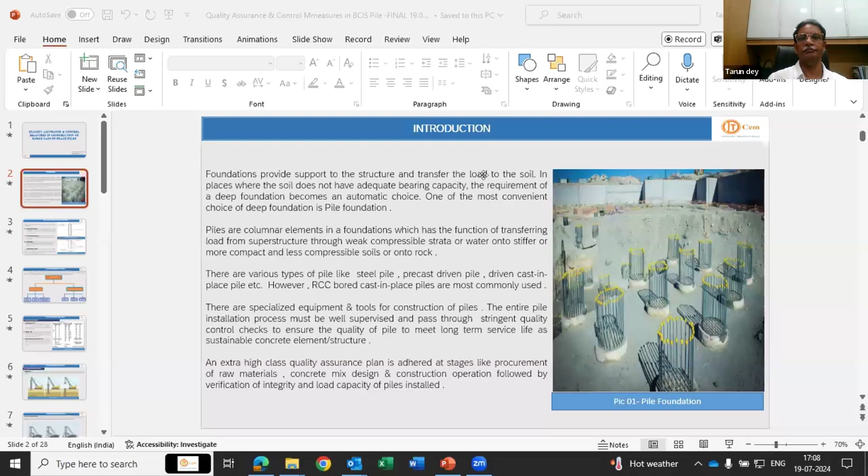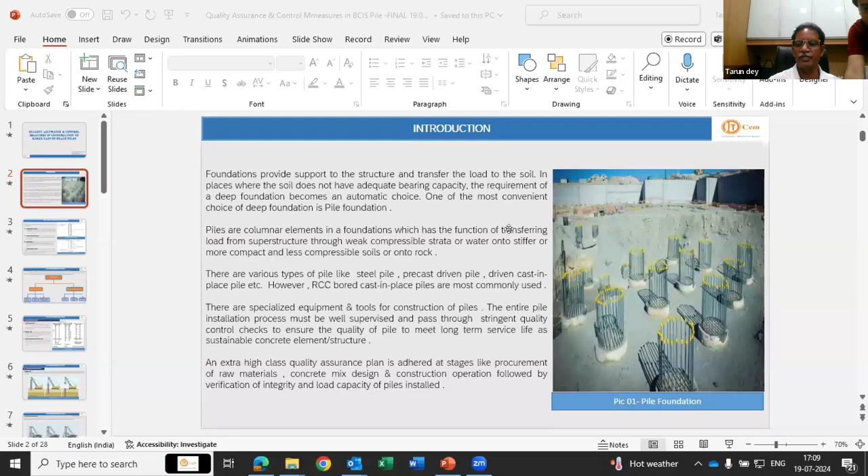This doesn't fully show in slideshow mode. Still not in slideshow mode, sir. Right, yes, yes, yes. Now we can see. Please continue, sir.

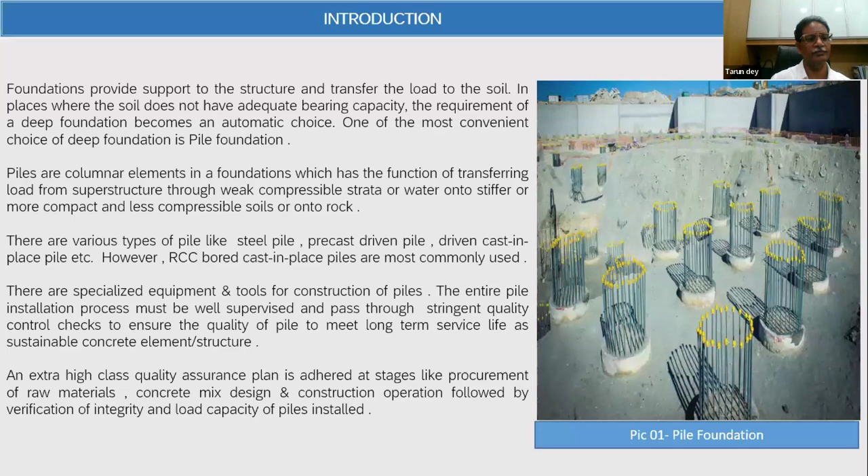There are various types of piles: steel, precast driven, cast-in-situ, bored cast-in-situ. Out of all these, bored cast-in-situ piles are most commonly used. We have specialized equipment nowadays for construction of these piles, but the whole process has to pass through stringent quality control checks to ensure the quality of the product. We maintain an extra high class quality assurance plan right from procurement of raw material to the end of pile construction, so that the integrity of the pile is ensured.

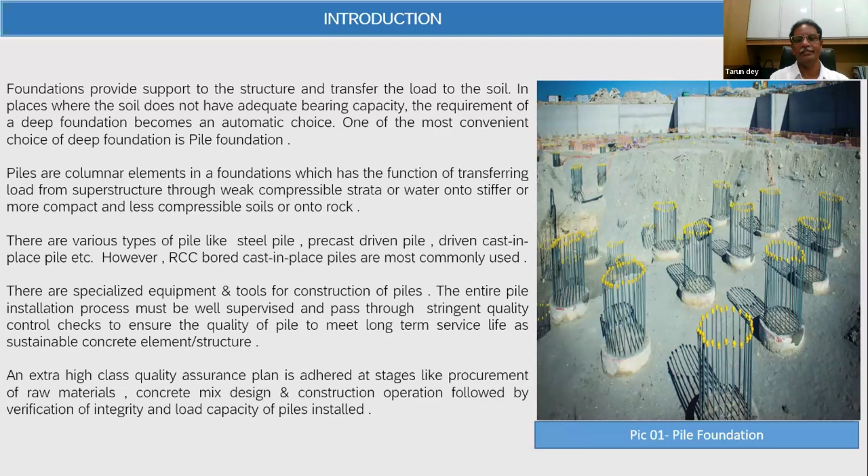On the lateral load, when the pile is loaded, it presses the adjacent soil so that it gets compressed, and both compression and shear happen in the soil mass, which ultimately resists the lateral movement of the pile.

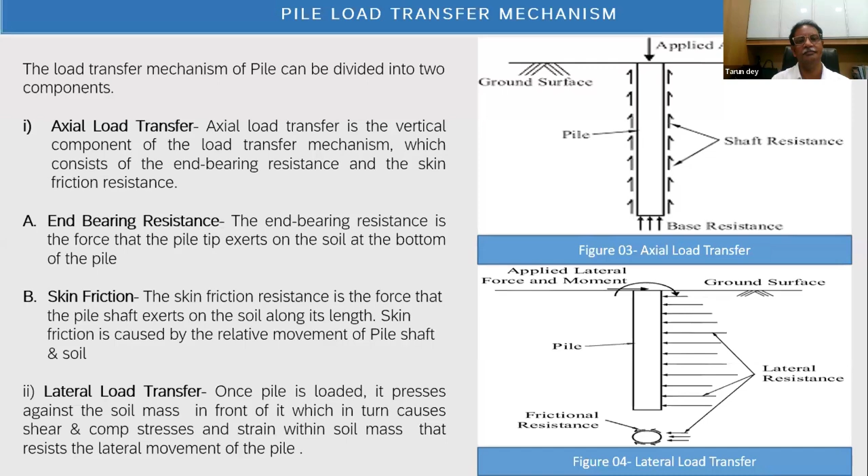In general, all piles are driven or bored into the ground. Broadly, there are two categories. One is called displacement piles. All driven piles are displacement piles, which could be large displacement or small displacement. Large displacement means driven piles with a shoe at the bottom, and small displacement could be hollow tubular piles. So the first category is displacement piles, and the second category is replacement piles, which is bored cast-in-situ piles.

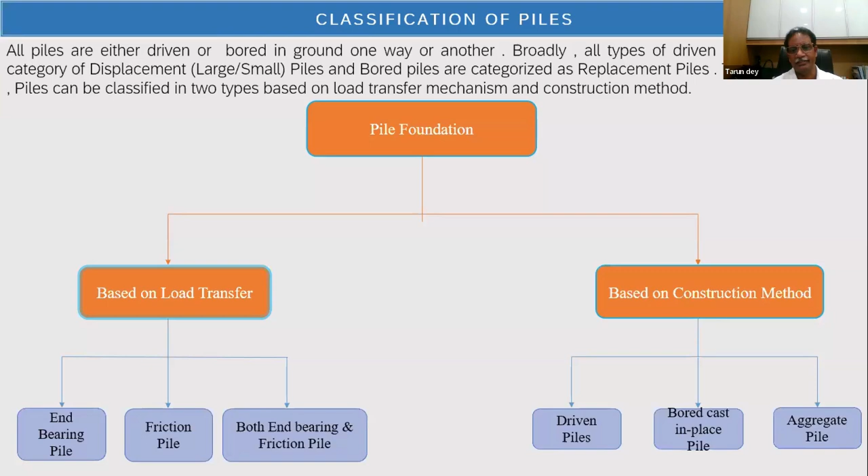Now, how does the load transfer mechanism take place? For end bearing piles, the pile rests on a solid layer, the rock or dense sand stratum. For friction piles, the pile transfers the load of the superstructure using frictional force. There are also piles which have both components, partly skin friction and partly end bearing.

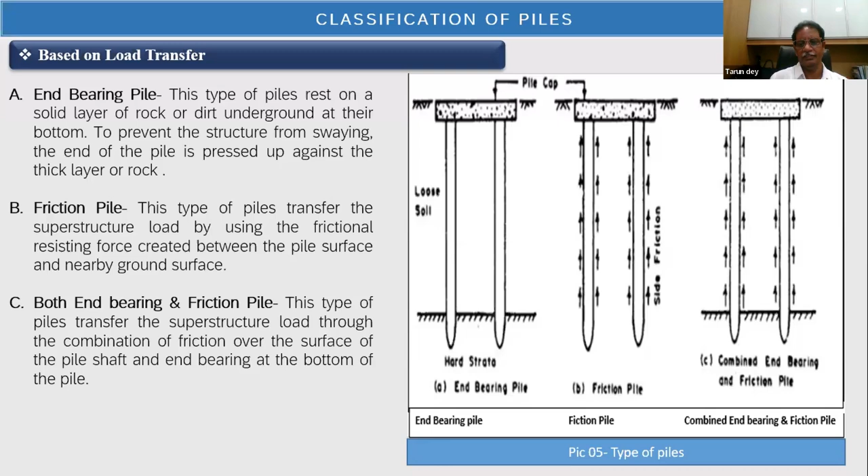This is one construction method, the driven pile, where the pile is driven by a hammer of suitable capacity, which pushes the soil sideways and compacts the layer, ultimately increasing the bearing capacity.

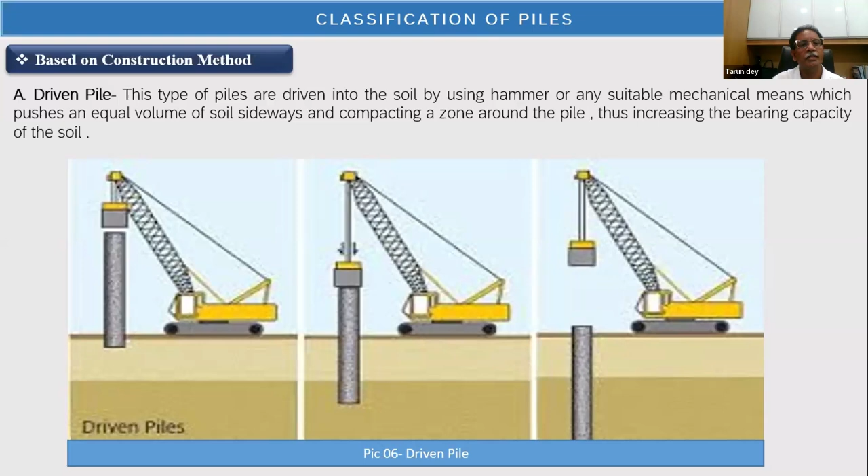This is the bored cast-in-situ pile, shown in three stages. Stage one is boring by auger. Stage two, once boring is completed, lower the steel cage. Stage three is filling with concrete. This is a bored cast-in-situ pile, where the hole is dug into the ground and filled with concrete along with steel reinforcement.

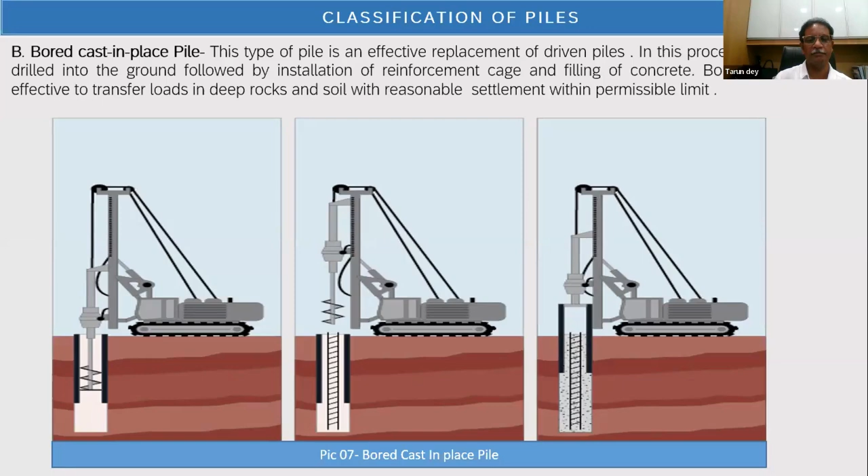Then there's the aggregate pile, similar to a bored pile but with no reinforcement. You dig a hole and put aggregates into it, which pushes sideways and densifies the soil, increasing the bearing capacity.

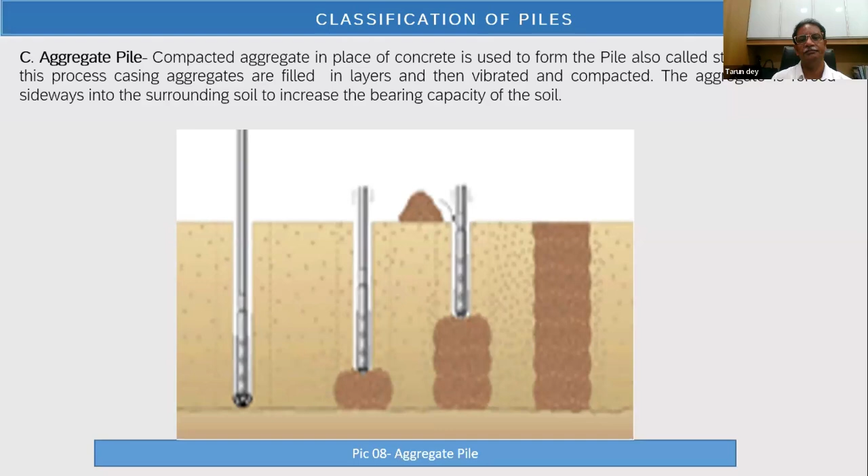Various tools are commonly used, like rigs. Nowadays we use rotary rigs, hydraulically operated. In earlier days, we used mechanical rigs in tripod form. For placement of concrete, we use tremie pipes, with a funnel or hopper at the top. For support fluid circulation, we need a tank with pump, called the bentonite tank. Then a crane is used as a lifting device for shifting materials and for lowering the cage.

Then concrete batching plants for production and supply of concrete. Transit mixers are used for transportation of fresh concrete from the mixing point to the placement point. These are the major equipments needed; other than these, small accessories would also be required.

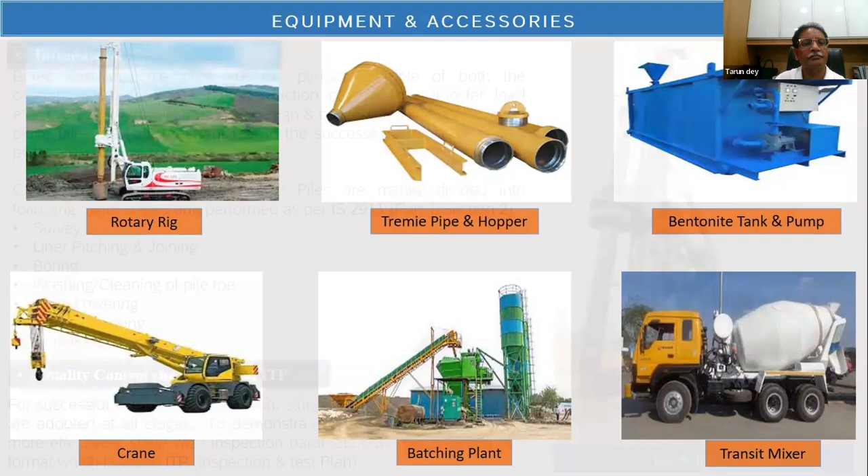Now let us turn our focus more on today's subject, that is bored cast-in-situ piles.

Now, what are the various stages? The major stages till completion of a pile, right from the survey. First, you do the survey to find out the points where you actually need to install the pile.

Once it is finalized, then you start with the driving of a casing or a liner. It could be removable type or permanent type. In case of permanent type, a longer casing, it could be jointed segment by segment. Then it goes up to a particular depth where it has got full fixity and the sides of the borehole are stabilized. After that, you start boring with the help of support fluid, where the sides of the borehole are stabilized. It could be bentonite or could be polymer.

Once the boring is over, then washing or cleaning of the pile base is done so that the latent debris, bigger pieces of soil, etc., do not remain at the base of the pile. Once the base is clean, then you put the reinforcement cage. In case of a longer pile, it could be in segmental manner, if it is more than 10 to 12 meters. Once it is completely lowered, then we make arrangement for the placement of concrete through the tremie pipe. We call it tremie lowering, then concreting.

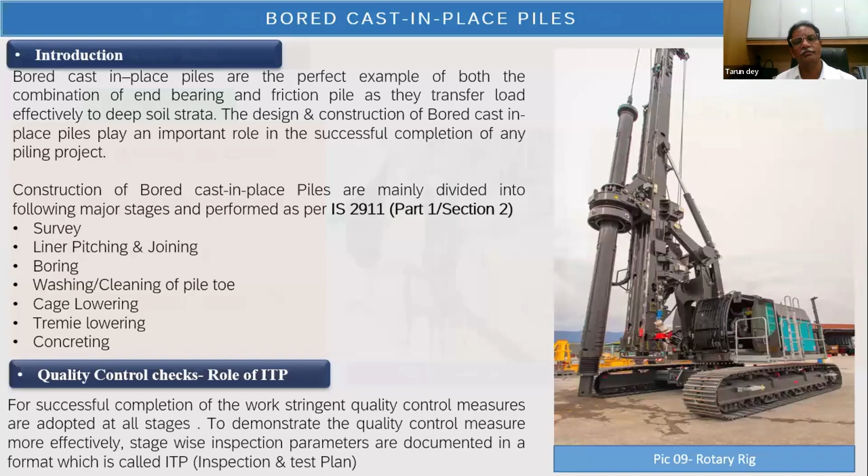First, you need to do the survey. You need to have a calibrated instrument which will put the point on the ground. Then you measure the levels, mark it, put your reference points, so that you are ready for the driving of the first casing. So your checkpoints would be the calibration, ensuring proper location, ensuring coordinates, and ensuring proper documentation.

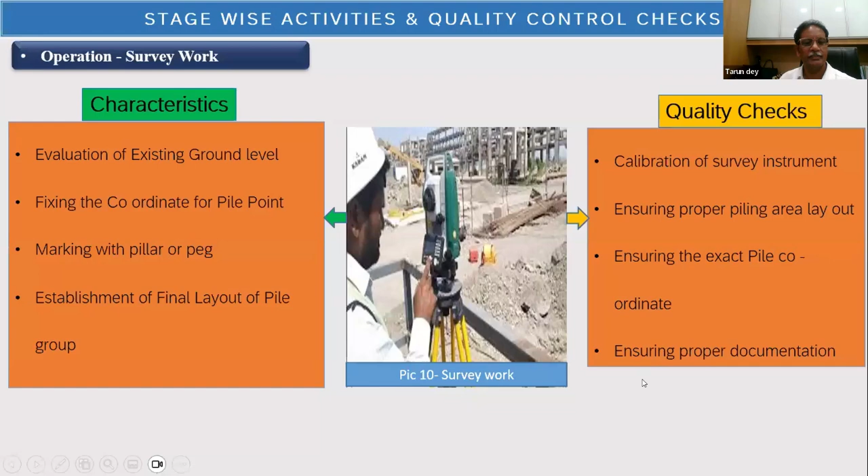Then comes the driving of the temporary casing or liner. You drive the casing - here in the photographs it shows a temporary casing. It could be 3 meters, 4 meters, something like that, based on the soil profile. It needs to be terminated to a reasonably strong ground, beyond which the borehole can sustain stability by itself with the help of support fluid.

Now, in case of a permanent liner, when you are passing through relatively longer layers of loose layer or highly compressible layer, then you need permanent casings for a longer depth until it is stable. In that case, you put casing by casing in a jointed segmental manner and do the welding. After this termination is finished, then you have to start the boring.

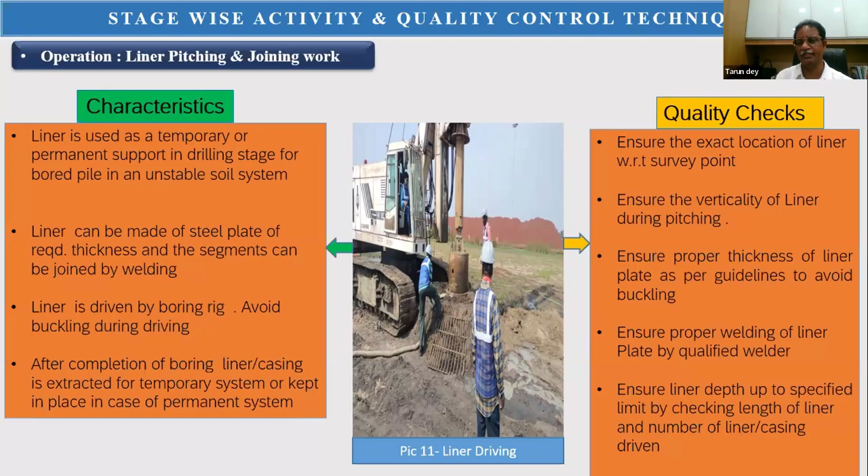Then boring starts when the liner is fixed, or your temporary casing is terminated, you start boring. Normally at this time you need the help of support fluid. The purpose of this is to stabilize the sides of the borehole so that it does not collapse in spite of external water pressures. So the normal support fluids we commonly use are bentonite or polymer.

Bentonite is a clay mineral. It has got certain properties that need to be checked before we use it, otherwise in the process of supporting the sides, it may destroy them. So in the process, what checks do you do? You see the quality checks on the right side.

Checking of the borehole positions, verticality, ensure the calibration of the automated depth meter if you use the depth meter of the boring rig for the depth measurement purpose, then pH and various parameters of the support fluid. I will show you in the next slide in detail about the properties of the support fluid, which plays a significant role in stabilizing the sides of the borehole so that your bore is stabilized and clean.

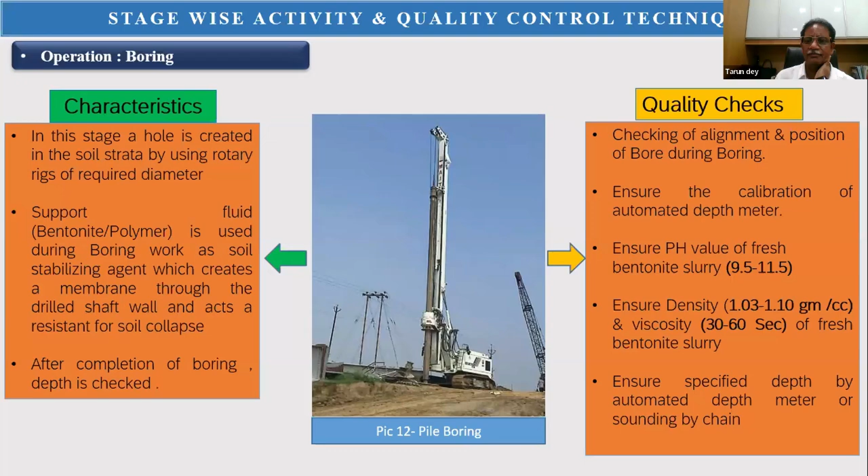So these are the two types. For bentonite, we need four properties to be verified: viscosity, pH, liquid limit, and density. Liquid limit, of course, we check at the material selection stage, not during boring or on the field. On the field, you need to check viscosity, pH, and density.

So it is 30 to 60. Based on the porosity of the layer, the viscosity will increase. As a general practice, for the porous, granular layer it could go up to 50-55, while for clay layer it could be less, 30 to 35.

Similarly, if we use polymer, the fresh polymer properties of viscosity, pH, and density are given. Sand content is not required to be measured at the fresh stage, but it needs to be measured when you start concreting. The borehole fluid needs to be checked for sand content.

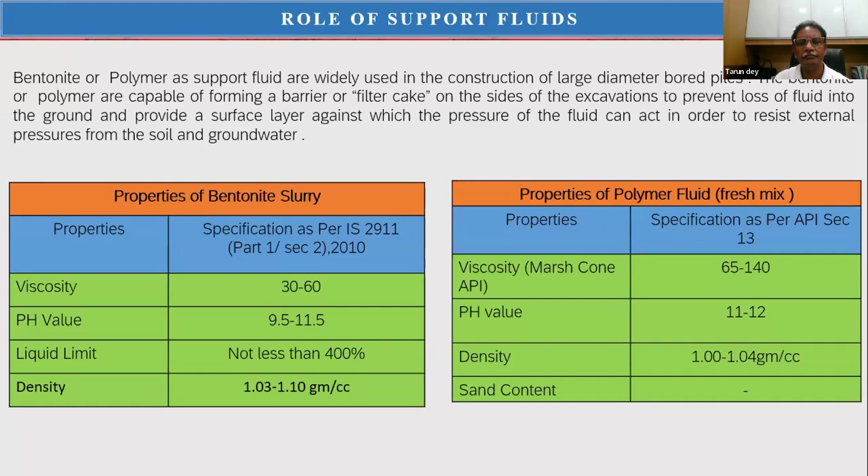Now, cleaning of the pile toe - this is the most significant, most important part of the pile installation process. Once the boring is over, if you are using the rotary rig, with the help of a cleaning bucket it needs to clean the bottom.

Once the cleaning is over by the bucket, you can run fresh bentonite circulation to bail out debris and contaminated material at the bottom of the borehole by recirculation. Another technique of cleaning the base could be the airlift principle, where you put air at

the bottom of the hole, which reduces the specific gravity of the borehole fluid at the bottom, and it comes up. But it requires proper care - how much, what should be the flow of air, that requires experience, especially in granular layers.

Now while checking and completing the base cleaning activity, there are quite a few significant indicators. In case you are using bentonite as the support fluid, the sand content should be less than 4%, and the density of the fluid should be less than 1.12 with respect to Indian standards.

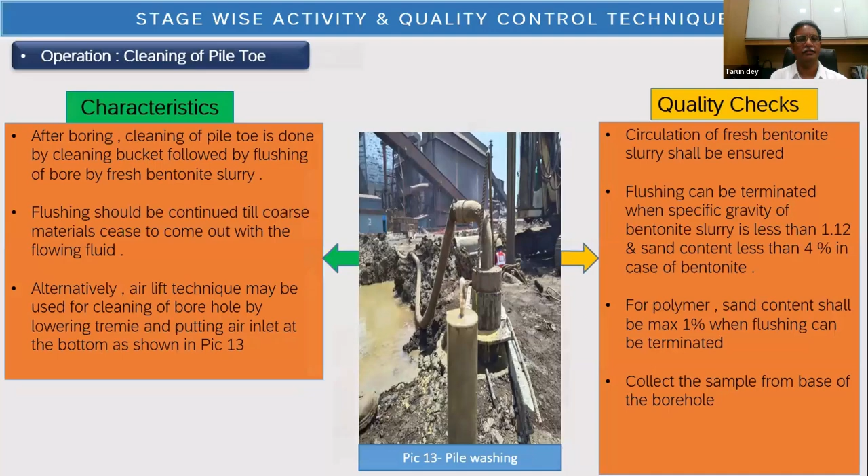Once you're satisfied with the cleaning of the base or toe, you are ready for lowering the reinforcement cages. For longer piles, cages will be in segments, joined segment to segment by proper welding. Lower the cage - it should have cover blocks all around, in sufficient numbers, so that it maintains the cover both in circumferential direction as well as longitudinal direction.

While doing this activity, your checkpoints could be: is the cage fabricated as per the drawing or as per the schedule, the bar bending schedule you have made. The number of bars are same as per drawing, links are same as per drawing. Then the joints are properly welded so that it takes the load.

Spacing of cover blocks should be adequate. Proper lapping should be maintained as directed or as specified. Do the welding preferably with E7018.

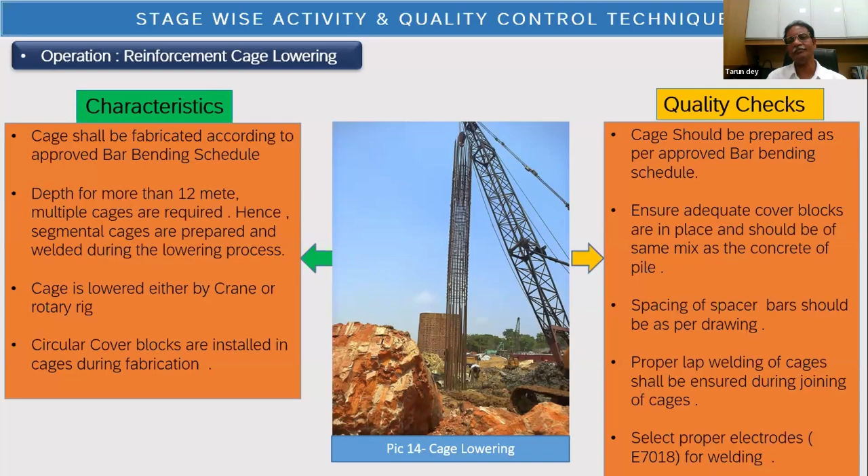Now the last phase, we are coming to the last stage of the installation process - the placement of concrete. The whole success depends on how well you are able to place the concrete. Once you remove the tremie head and add the funnel at the top, as you see in the photographs.

Now there will be a plug at the bottom of the hopper. First you fill the hopper, then pull the plug so that the concrete rushes down the tremie, goes down and replaces the latent scum at the bottom, taking its position. So the first charge replaces the bottom scum, if any left after flushing. The good concrete takes the place and the contaminated concrete comes to the top - that's why I call it the replacement process.

Subsequently, you keep on pouring the concrete and terminate, cutting and removing the tremie as the concrete shaft develops with respect to time and the pouring of additional concrete.

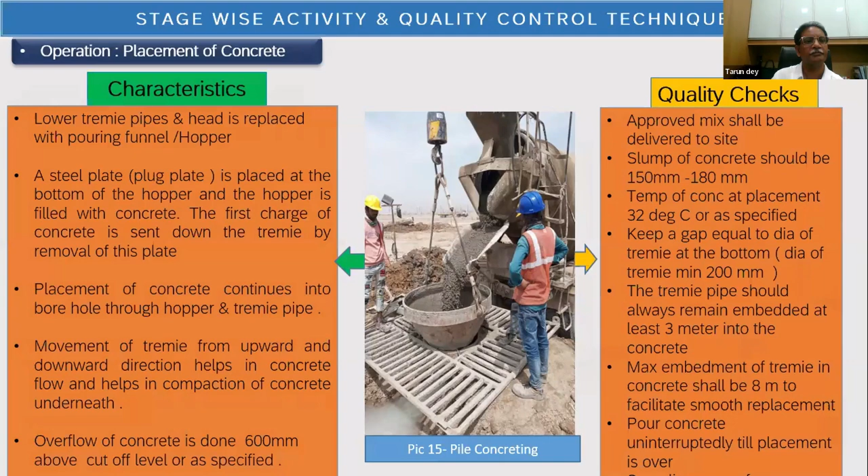Now once the pile concrete is over, various checks and balances have been gone through during the process. Then, even up in the completed pile, we have another level of checks. One of the popular tests is the pile integrity test, where we can check the health of the concrete shaft - whether there are any major voids, cracks, discontinuities, etc., or the consistency of the pile shaft.

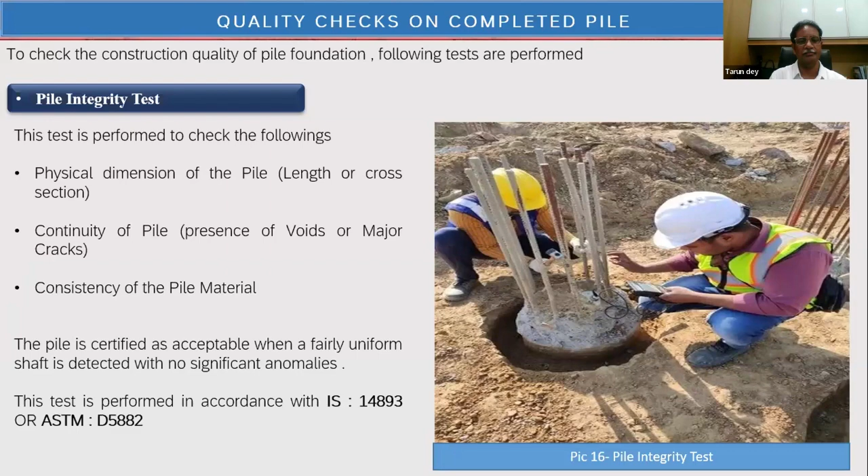This can be done by the pile integrity tester. Various codes are there - Indian standards and ASTM are also there. Various projects suggest various quantities of such tests, but nowadays in major projects we are doing 100% piles under PIT. So this is a quick check of the concrete shaft.

Now there's another test called cross-hole sonic logging. This is a further improved one, where you can see the defects, their location, and the extent of the defect in a better way. This test requires inserting 4 pipes in the pile before you cast, which is one of its limitations - it requires advance preparation, as you need to identify in advance which pile you will do the cross-hole test on. The quantum could be 10% to 20% for any site, but it requires advance preparation, and these pipes could be of steel or PVC.

So, get the report. The report can be reviewed to see the satisfactory nature or any discrepancy, and you have to take action accordingly, at whatever level it shows an issue.

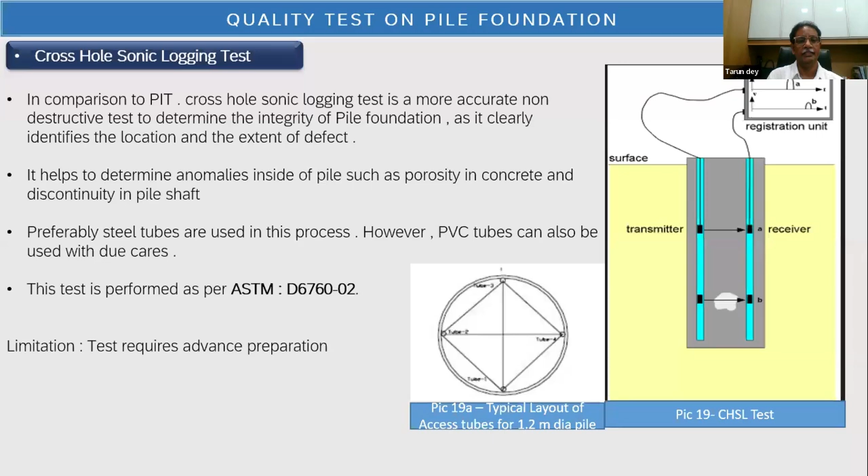Then there is one important test: the vertical load carrying capacity test, or compression test of the pile. The pile is designed for a certain capacity, and during construction, a certain number of piles are tested for workmanship, to check whether the people are adhering to the right workmanship or not. So there are some random tests where we put 1.5 times the design load on the pile and see the deflections on pile head.

Normally the acceptance criteria is: maximum settlement is 12 mm for a 600 mm pile. In case of pile diameter beyond 600, it's 18 mm or 2% of the pile diameter, whichever is less. If the deflection is within this limit, it is okay. If it exceeds the limit, it is not okay and requires further review and the designer's recommendations about the next course of action.

Now, all these inspection tests that we discussed earlier can be formulated and planned in a formal format, which in industry we call the inspection and test plan. We normally do this in Excel format, which includes all the necessary checkpoints.

It includes at what stage this check is to be done, what the specification says about it, what the acceptance norm is, at what interval the test should be done, and who will do the test and the inspection. All these things are put in tabular form as guidelines for the activity engineer as well as the inspection engineers. At each stage you inspect and capture the data. If it is okay, satisfactory, fine. If it's not okay, you need corrections before going to the next step.

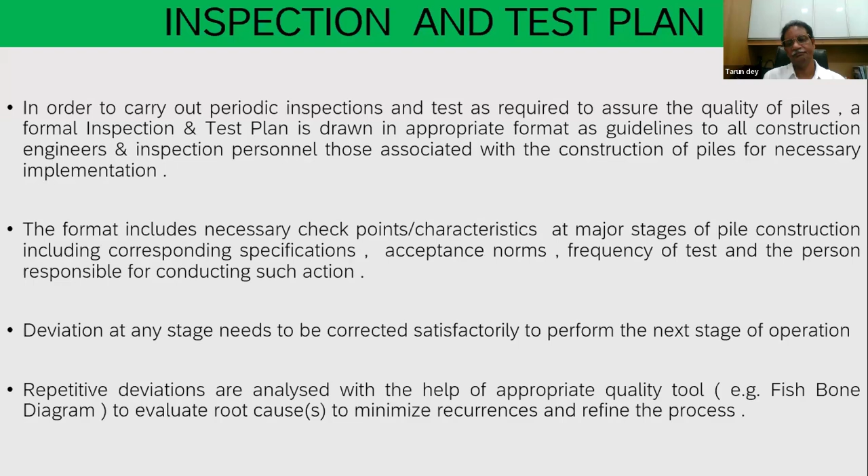So this is one format we are discussing, the formal inspection test plan, covering the various stages just discussed, put into this format.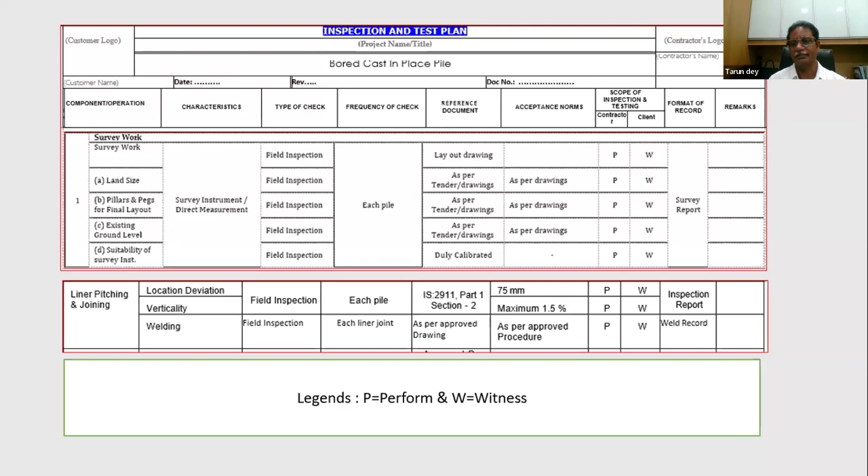In the columns, component operation means stages of work: survey, liner driving, boring, concreting. Characteristics means the various things you should check. In case of boring, you check support fluid characteristics and the depth. Type of check refers to field or laboratory checks, frequency refers to how often the test should be done, and the reference document tells which standard to follow for that particular parameter or characteristic.

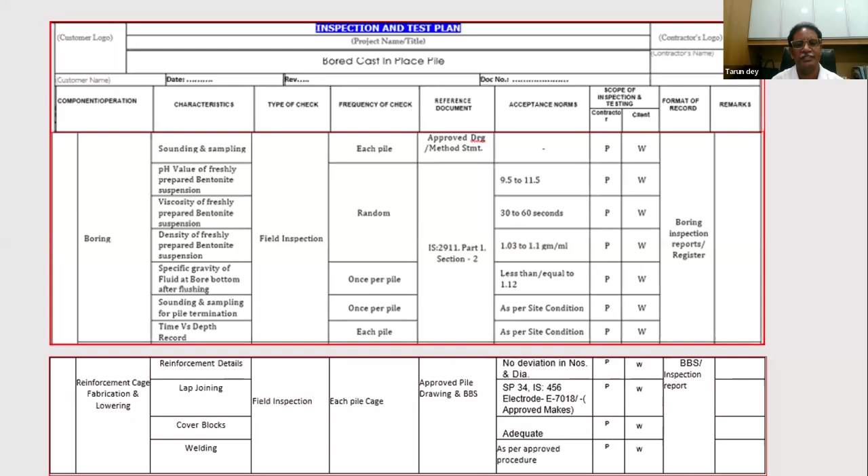For example, in case of boring, row number 3: viscosity of freshly prepared bentonite suspension is the characteristic. Type of check is field inspection, frequency of checks is random, and the guideline is found in IS 2911 Part 1 Section 2. The acceptance norm is that the viscosity of freshly prepared bentonite suspension should be 30 to 60 seconds.

Now, who will perform the test? The contractor. Who will witness the inspection? The client or the consultant. Then in which format you will record all these observations is also written in another column. So this is a formal format widely used in the construction industry to note all the characteristics for inspection and see whether the acceptance norm has passed or not.

If it passes, go to the next stage. If it doesn't pass, take some action, satisfy it, then go to the next stage. And where you frequently see variations on a particular case or characteristic, you need to ponder in depth why it is happening time and again.

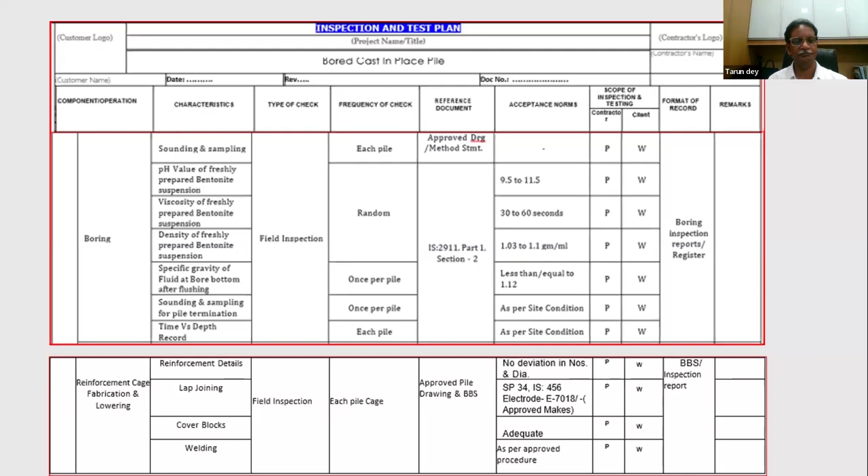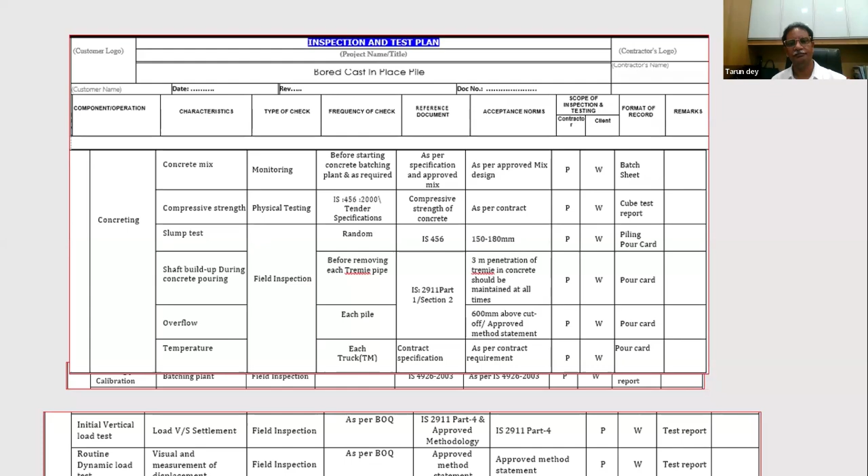The improper estimation of the placement needed to build the required shaft. Or sometimes, when you remove the temporary casing, due to loose soil all around, the concrete slumps more than estimated. It goes sideways, and ultimately the height of the shaft comes down, proving your estimation wrong.

Reinforcement necking: sometimes after excavation or through a PIT, information comes that there is necking at 10-meter depth or 19-meter depth. What could be the probable reasons? Insufficient cover blocks broken during lowering of the cage due to poor strength.

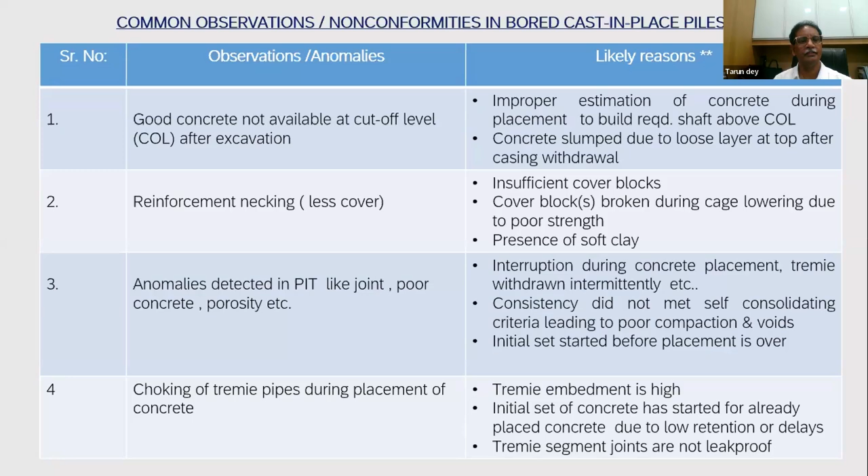Then bore collapse during boring. This also happens in granular soil layers. We have faced these problems.

The support fluid takes the lead role in this particular case. Support fluid viscosity or mud weight being less than required, interruption during boring meaning a long waiting period, a highly porous granular layer with coarse sand, high pore water pressure, and standing water level higher than the borehole fluid level are factors. Poor quality of support fluid is also an issue. If it does not match the required properties, you can't expect the performance you desire.

Excessive settlement during compression test of working pile is purely related to base cleaning not done properly. There could also be cracks or porosity in the concrete shaft, or variation in soil strata where the actual condition is poorer than what you assumed at the design stage. That could be one of the reasons, but base cleaning is mostly responsible, as we have seen from past experience.

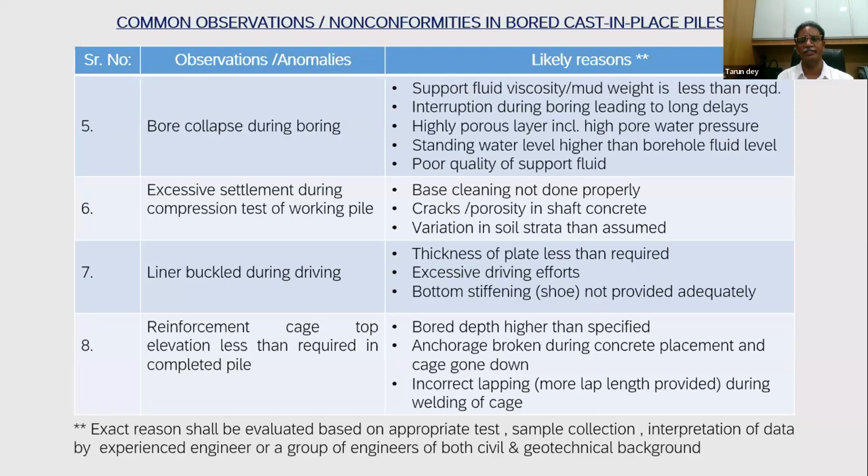Now we conclude. The construction of a durable and sustainable RCC structure—nowadays we always talk about sustainable construction where the intended service life is higher and higher. So now 100 years, 120 years, like that is the intended service life. So quality assurance plays a significant role in assuring the intended service life of the structures.

It requires meticulous planning, good infrastructural arrangement—you should have updated instruments as well, modern plant and equipment, competent supervision, and trained and stringent quality control to succeed.

The key parameters I should focus on, which need special attention to ensure a good pile, are: stabilizing the borehole throughout the entire operation, cleaning of the pile toe, and placement of concrete uninterruptedly through tremie. These three things are the key parameters or key factors for success in having a good pile.

Quality control must be effective and demonstrated by a trained and experienced group of engineers at each stage of the pile installation process, to assure product quality for the intended service life.

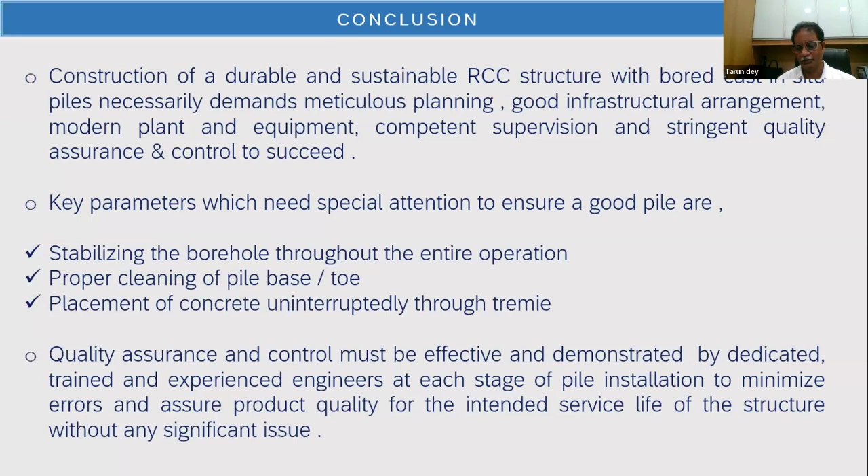So with all this, I come to an end of my presentation. Now we can have some question and answer session on the part we have discussed.